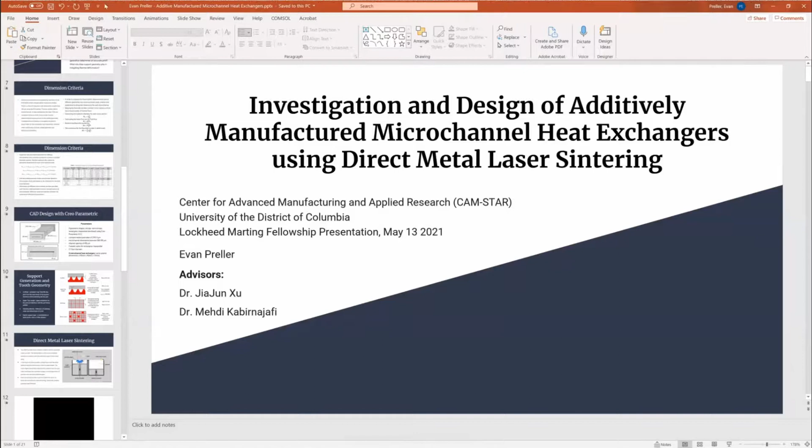Thank you for the introduction, Dr. Nietzsche. The title of my presentation changed a little bit. It's the investigation and design of additively manufactured microchannel heat exchangers using direct metal laser sintering. My name is Evan Preller. I'm an undergraduate working with the Center for Advanced Manufacturing and Applied Research at the UDC, CAM-STAR.

And I'm working under my advisors, Dr. Xu and Dr. Kabirnajafi. So moving on, just a little introduction of what a lot of that title means. Microchannel heat exchangers have a wide range of applications. They're used in aerospace, automotive industries, power generation, industrial processes, refrigeration.

The suitability of microchannel heat exchangers for these applications is a high volume heat flux and a relatively compact size. And the demand for thermal management solutions only grows with the increasing complexity and usage of electronic components. Essentially, we are trying to pack more and more electronic components into a lot of aspects of modern day life. And with that becomes thermal interference as those electronics are in closer proximity. So thermal management solutions are only going to grow. They're not going to plateau. There's increased need for this constantly.

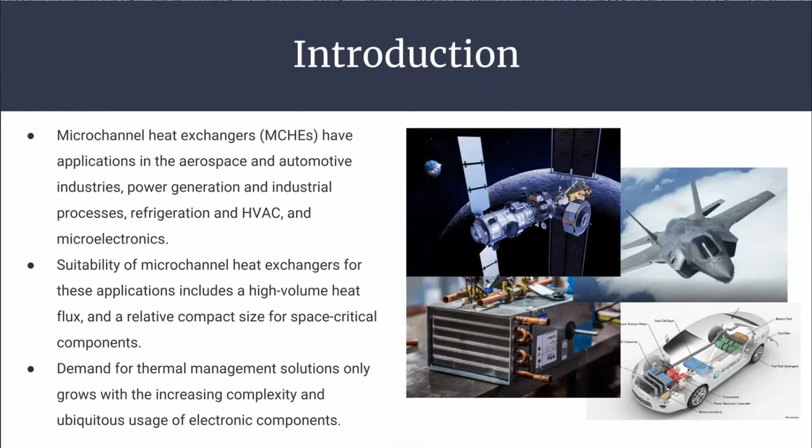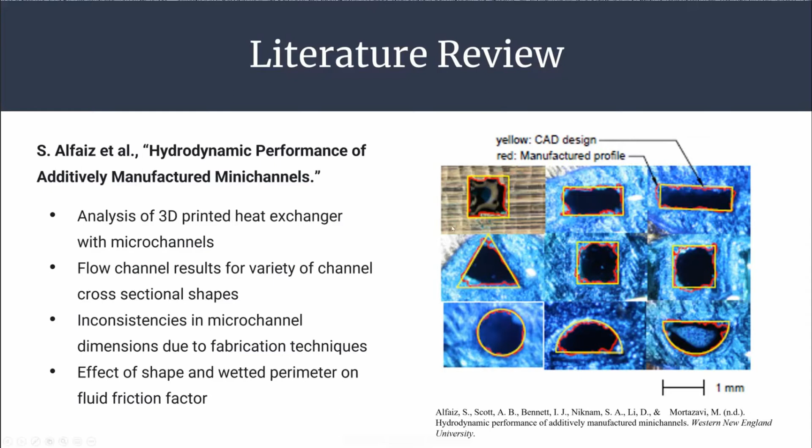What they were trying to do in this paper was analyze hydrodynamic performance, and that has a lot to do with the friction factor in these channels, because additively manufactured components often have a higher surface roughness than traditionally manufactured ones. It has an effect on fluid flow. And what they found, maybe unsurprisingly, was that the microchannel with the largest wetted perimeter, that is the maximized contact surface between the flow and the channel walls, had the highest friction factor. And they were much higher than laminar flows of smooth channels.

Now, in this paper all the channels had a consistent cross-sectional area of 1 millimeter squared. But looking at the wetted perimeter, because it had the highest friction factor, we thought rather than have a consistent cross-sectional area, let's try and go for a consistent wetted perimeter.

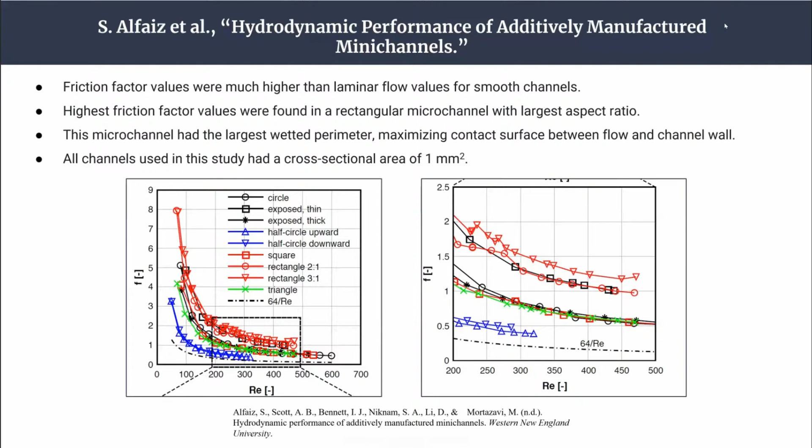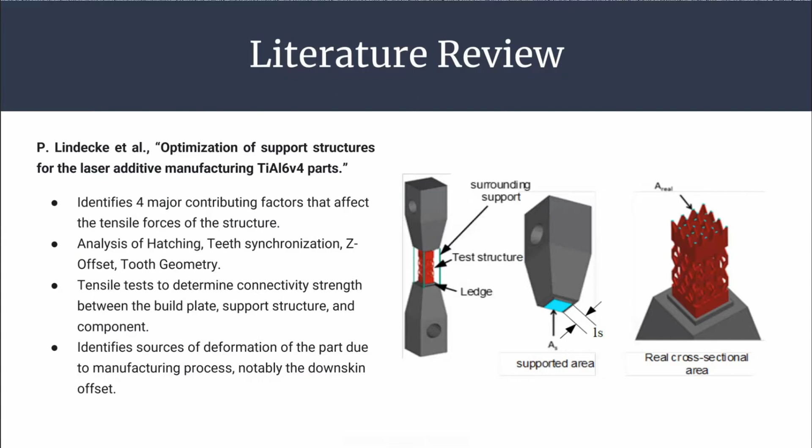Because we're additively manufacturing this, we also needed to develop supports for what was going to be printed using the UDC printer. A large part of that is the support structure that goes into preparing the piece for actual printing. This paper, the optimization of support structures for laser additive manufacturing, was very helpful in determining what we could accomplish with support structure. A big part of additive manufacturing is balancing post-processing, that is removing these support structures from the finished piece, against printing time and the amount of material you're using. Less support obviously means less post-processing, but there are some drawbacks to the actual printing process.

Going forward, here are some research questions we developed based on this. What are the critical design considerations for additively manufactured microchannel heat exchangers? Do the manufacturing techniques contribute to deviations from the CAD models, and do these deviations affect the overall performance? That was the friction factor of the fluidic performance that we're looking at. And then what kind of support generation determines an accurate print? What role does the support geometry play in mitigating thermal deformation and leading to a successfully printed component? So the first step in this was looking at our dimensioning criteria for the microchannels.

We were initially given some constraints. One was based on the resolution of the EOS M280 printer, which is the metal 3D printer at the university. You lose resolution below a certain dimension size, and that was about 400 to 450 microns. Anything below that, you're not really going to wind up with a coherent shape. It's just going to be a blob. So that was the lower end of our dimension process. And then the higher end was 1,000 microns, established by previous studies that made the designation between what is a mini channel and what is a microchannel, being less than 1,000 microns.

Beyond that, some geometric features of the semicircular channel would determine the measurement for the wetted perimeter. Essentially, the wetted perimeter for the semicircular was always going to be the largest. So we had to play a little bit of a puzzle, trying to fit within the criteria of a lower range of 450 microns and an upper range of 1,000 microns, and hit the same wetted perimeter for all different shapes. This would lead to different hydraulic diameters, but as long as we were keeping the mass flow rate and the wetted perimeter the same, we were trying to maintain a constant Reynolds number.

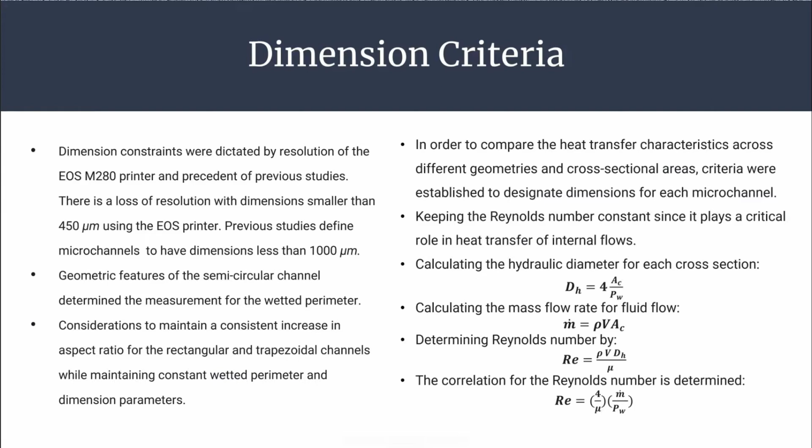So as you can see, when we maintained a constant wetted perimeter across the shapes, we can attempt to maintain a constant Reynolds number across the different geometric shapes we were working with. As I stated before, what was determining this was the semicircular dimensions. Essentially, they were the largest diameter, trying to fall below our 1,000 micron upper range and still have the rest of the shapes fall within the 450 to 1,000 microns. But we managed to develop 8 different shapes with the same constant wetted perimeter. And we developed several aspect ratios for the rectangular and trapezoidal shapes at regular, consistent intervals.

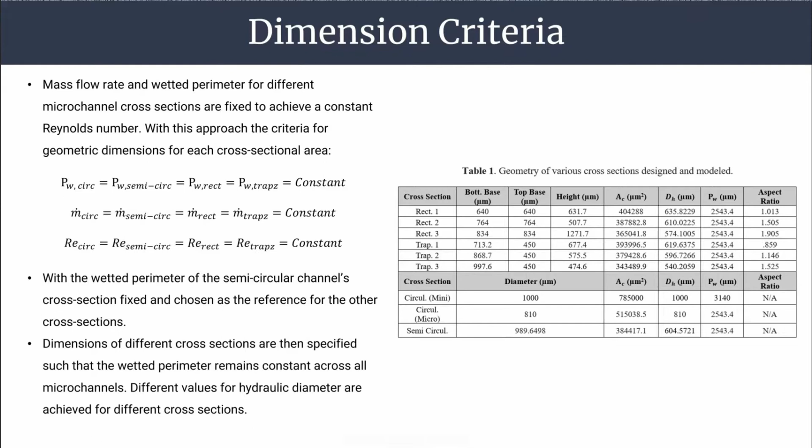So in the end of the day, what we came up with was 8 different microchannel heat exchangers utilizing 4 geometric shapes: circular, semicircular, rectangular, trapezoidal. These were all developed using the CAD modeling software Creo Parametric 6.0. We had a constant wetted perimeter for all 8 microchannels of 2,543 microns. We fell within our microchannel dimensions, classified as a microchannel, and also worked within the resolution capabilities of the EOS M280 printer. We had to maintain a regular channel spacing and our aspect ratios for the rectangular and trapezoidal shapes, as well as trying to get as many flow channels as possible across the face of the heat exchanger. And we wound up with 27 flow channels each across all 8 heat exchangers.

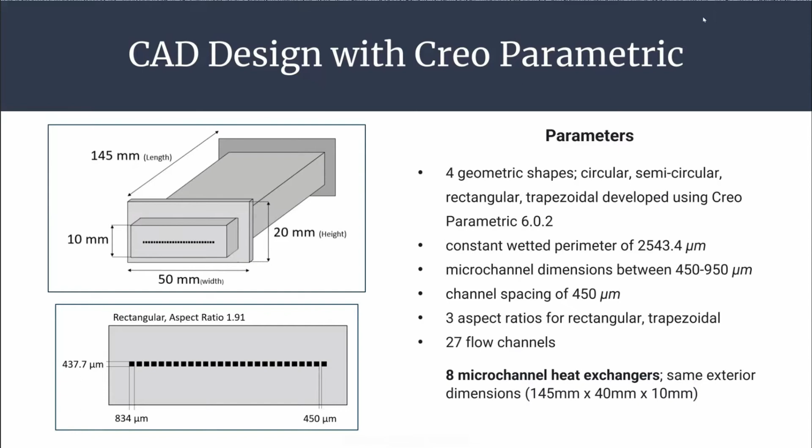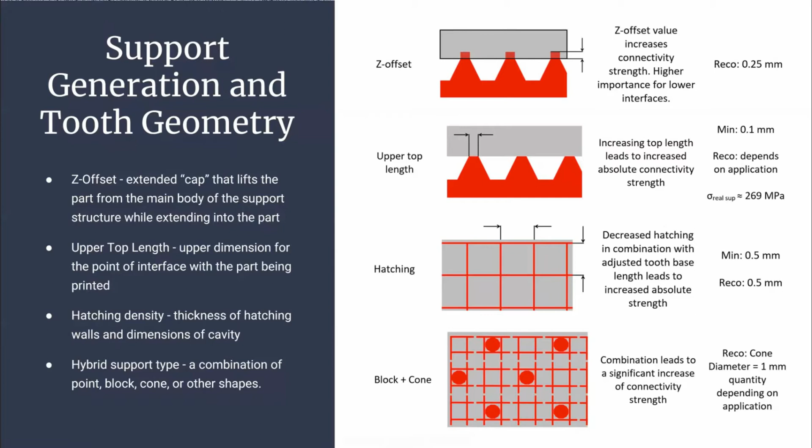So moving from our CAD geometry to our support generation and preparation for print, this goes back to the paper we were talking about by Lindecke. We were looking at basically 4 major factors that go into determining the support structure. This was the Z offset, which is like a little cap that sits on the top of the support structure that separates the part itself that's being printed from the support structure that connects it to the build plate. The top length of that support, this second illustration from the top, the hatching density, that is how dense the support structure is going to be, and then whether or not we're using a sort of hybrid support structure, that is a variation between a block, which is just like a straight line or a rectangular shape, and a cone, which is obviously a conical shape, and what strength considerations would go into using both of those.

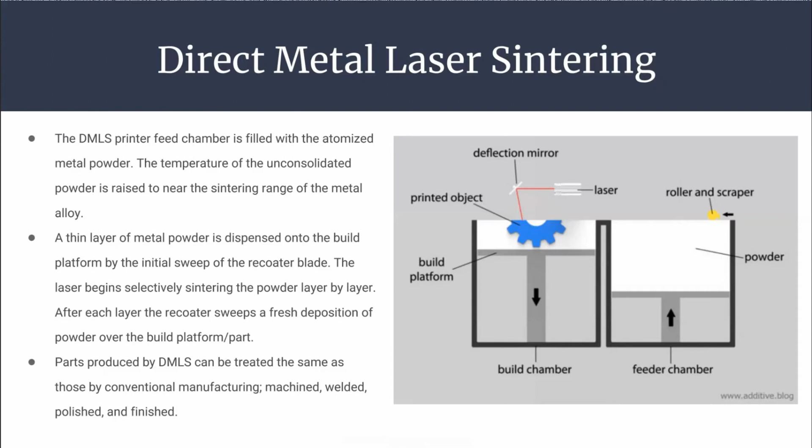Part of what's desirable about direct metal laser sintering is that these can be milled and worked with the same as traditionally manufactured pieces. So they can be welded, they can be polished, they can be finished, and you can come up with geometric shapes or novel shapes that you wouldn't necessarily be able to accomplish with regular or traditional manufacturing means.

I have a little video here. Hopefully it'll play.

But moving on. So as I said, the printer that we have at the university is the EOS M280 direct metal laser sintering system. It uses a laser to fuse metallic alloy powder in layers. It's got a laser power of 200 to 400 watts, which is adjustable depending on what you're looking to use or what kind of components you're printing.

Evan, you're at 13 minutes. Okay, wow. All right. So I'll move fast.

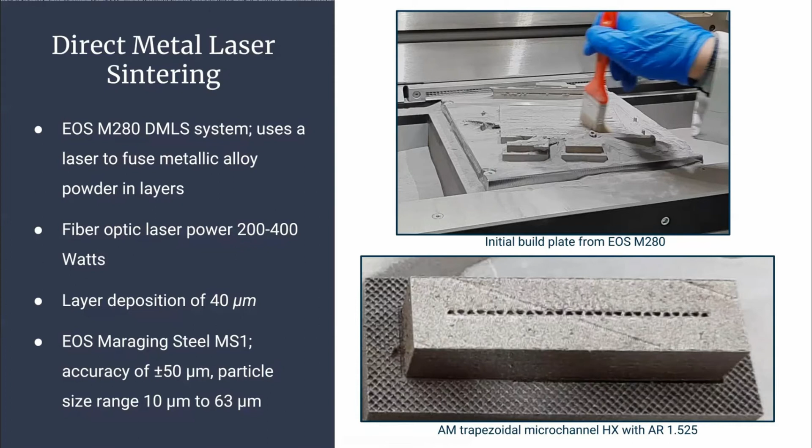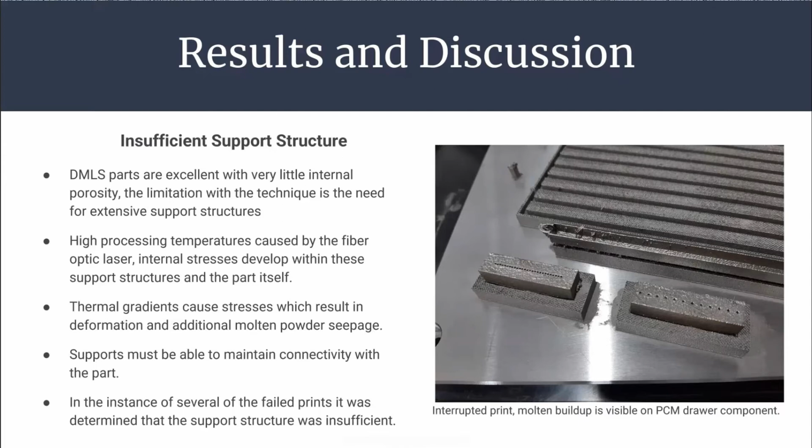We're using maraging steel in this, which is MS1, which has an accuracy of plus or minus 50 microns. So what we found initially printing is that we had some errors in printing. We had interrupted prints and aborted prints because we had an insufficient support structure. Essentially, we were trying to limit the amount of support structure that would have to be removed in post-processing. And what that was causing was, as thermal deformation hits the support structure, there's a lifting of the part from it. So this would interfere and come into contact with the recoater blade.

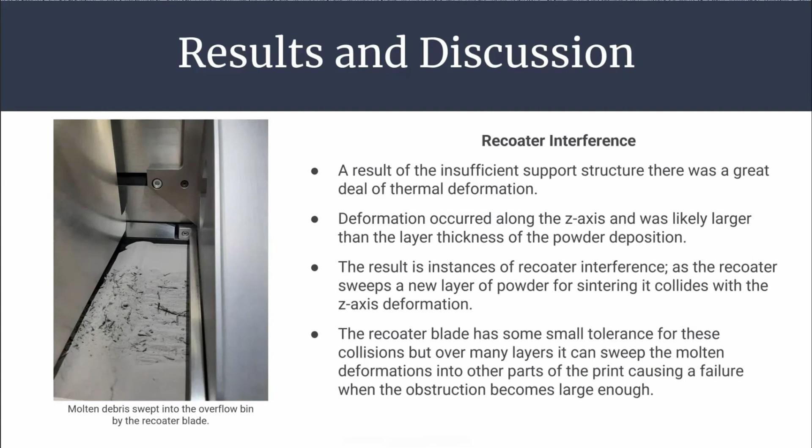So what happens is, as the recoater comes across, it's hitting these deformations. Essentially, the part itself isn't level, and it's interfering along the z-axis with the recoater blade as it tries to sweep a new layer deposition across. And a large part of that was what's known as the downskin offset effect, which is essentially that initial layer between the support structure and the part. Actually, molten powder leaks into the support structure. So you're left with kind of an uneven layer for the part to be built on. And it can affect how the recoater can deposit a fresh layer because it's constantly running into contact or obstructions.

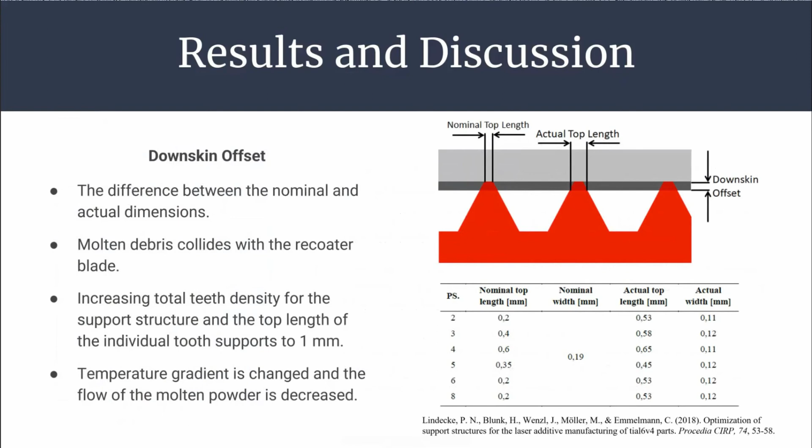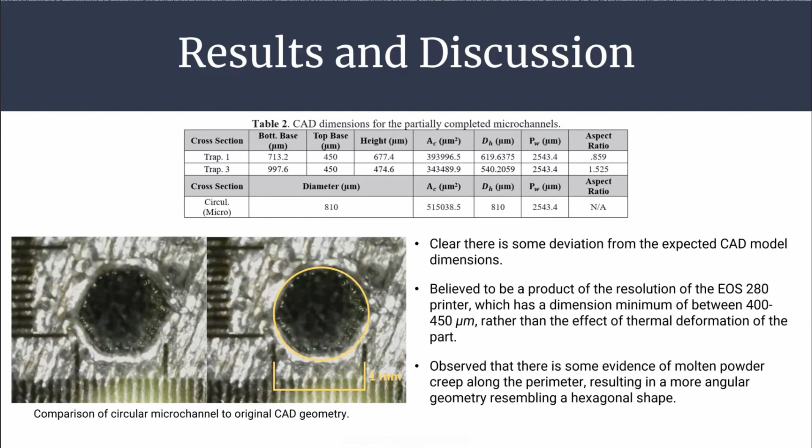So although there were no successful prints of the heat exchangers thus far, we can analyze some of the prints that were partially printed. And we had two trapezoidal and the circular cross-sectional area as well. And you can see in the left-hand picture there that it maintains mostly its circular shape, but you can start to see the limitations in the resolution of the printer because you wind up with kind of an almost hexagonal perimeter there, as opposed to a purely circular one. But an analysis of this would lead to whether or not these deviations from the CAD model are really going to affect our friction factor or our hydrodynamic performance experiments.

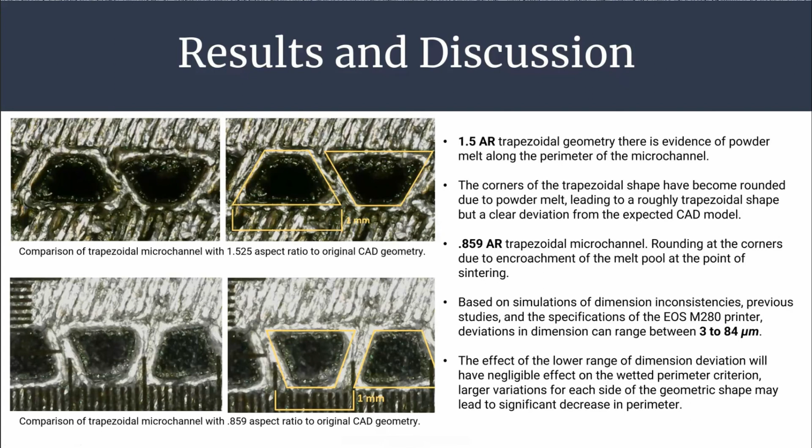Same thing with both the trapezoidal heat exchangers. We can see the largest aspect ratio on the top and the smallest aspect ratio on the bottom here. They're conforming mostly to the trapezoidal shape that we were looking for in the CAD design, but you can see some loss of resolution around the corners as it starts to kind of round off there. And with simulations and based on previous studies, we found that deviations in dimension can range between 3 to 84 microns, which 3 microns is obviously not a big deal, but if every dimension is off by 84 microns, then it's going to lead to a kind of inconsistent wetted perimeter.

So we start to look at simulation of additive manufacturing, how that could maybe help us predict some of the problems that we ran into initially printing in terms of thermal deformation, how that's going to lead to recoater blade interference. On the left here are just some illustrations of different simulations using different types of software.

Evan, we're at 16 minutes now. Perhaps you could finish up.

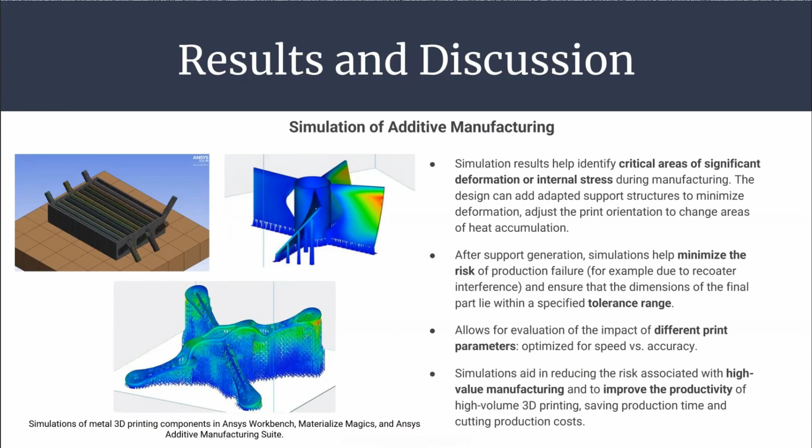Sure. So you can just see that the support structure can be estimated to see if there's any sort of thermal deformation, if there's going to be some sort of interference in the z-axis, or any sort of thermal deformation of the finished part.